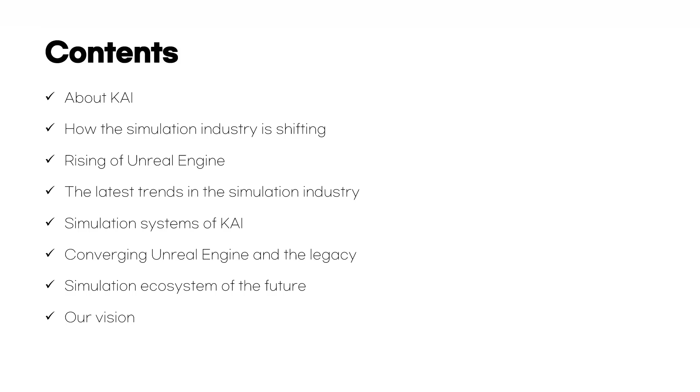2024 series. In this session, I will talk about the latest trends in simulation that have changed with the advance of Unreal Engine and show you how Korea Aerospace Industry has merged its legacy simulation system with the latest trends. I will also share our future vision for how we plan to utilize Unreal Engine in the future to develop sustainable simulation content.

First, here is Korea Aerospace Industry. You can call us just KAI. KAI is a total solution provider in aerospace.

Chapter 1 is simulation ecosystem. I want to talk about how the simulation industry is shifting first. In recent years, the simulation industry has experienced rapid development, bringing about significant changes.

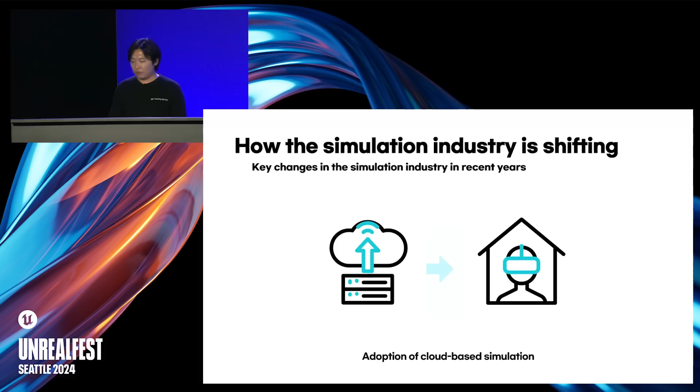One of the key changes is the shift to cloud-based simulation, which has greatly enhanced accessibility and collaboration. Cloud-based simulation provides access to high-performance computing resources from anywhere in the world, enabling seamless collaboration across remote locations. As a result, we can now perform more complex simulations faster and more efficiently while reducing our reliance on physical infrastructure.

Digital twin technology creates digital replicas of physical assets that exist in the world, allowing their condition to be monitored and simulated in real time. This technology is primarily used in manufacturing, aerospace, and construction, among others, to reduce maintenance and operational costs and enable predictive maintenance.

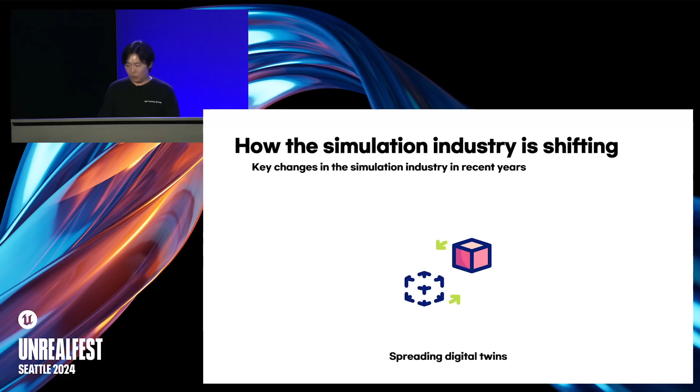Integrating AI and machine learning technologies into simulation has led to more sophisticated and predictive results. These technologies play a big role in anticipating problems that may arise during the design phase and finding optimal solutions through iterative simulation. Machine learning is automating data analysis during simulation to maximize efficiency.

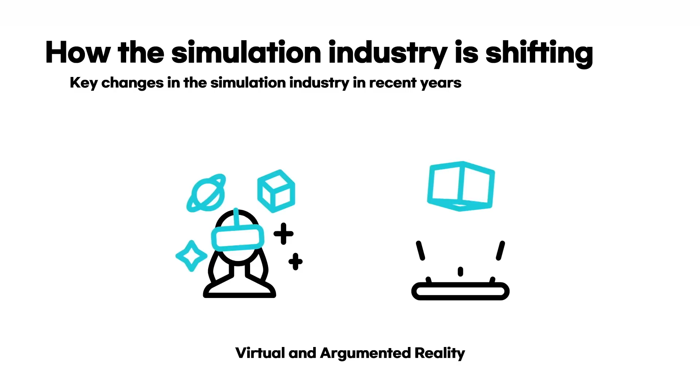Virtual reality, VR, AR, MR, have greatly enhanced the immersion in training and simulation environments. These technologies are increasingly being used in highly immersive areas, particularly in aerospace, military, and healthcare, and are helping to make learning and training in real-world environments safer and more efficient.

Simulation software is also starting to adopt microservices architectures. This approach breaks down the simulation process into smaller, independent services, each of which can be developed and deployed independently. This greatly increases the flexibility and scalability of simulation software and allows for faster updates.

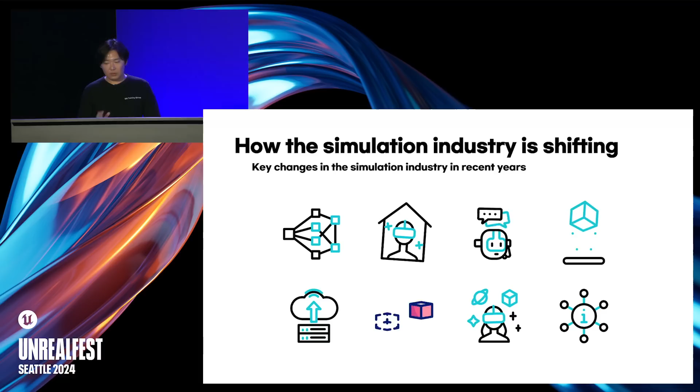These changes are moving the simulation industry from a simple modeling tool to a core technology that delivers complex engineering and simulation solutions. These trends are expected to evolve further and drive innovation across a wide range of industries.

So let's look at the simulation ecosystem in Unreal Engine. The simulation team of Epic Games once said there are two industries that are leading the way in real-time 3D graphics: the game industry and the simulation industry.

I agree with that, and I believe that Epic's Unreal Engine, which has been a leader in 3D graphics for many years, is not only a game engine, but also a simulation engine.

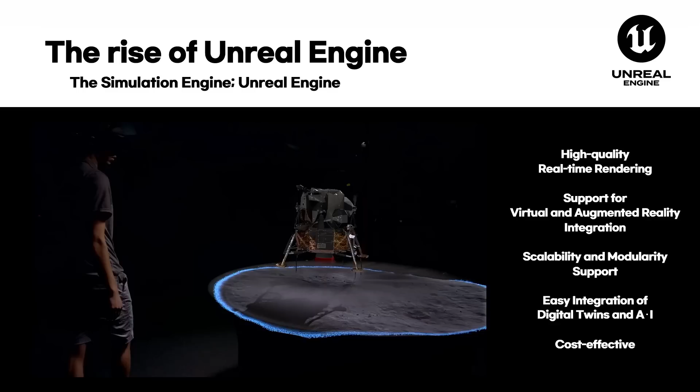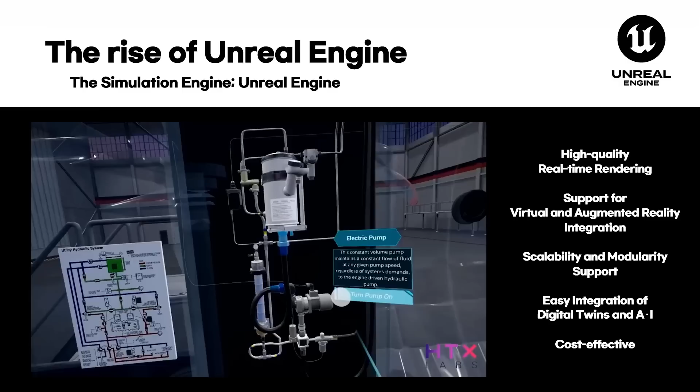Unreal Engine has made significant strides in the simulation industry. Its advanced graphics capabilities enhance immersion, especially in aerospace, automotive, and military training. It seamlessly integrates with VR, AR, MR, adding depth to simulations, and its modular design supports easy scaling and integration with legacy systems.

The use of Unreal Engine with digital twins and AI increases efficiency in maintenance, designs, and operations. Furthermore, its open source tools reduce costs, making high-quality simulations more accessible and enhancing realism and efficiency across the simulation ecosystem.

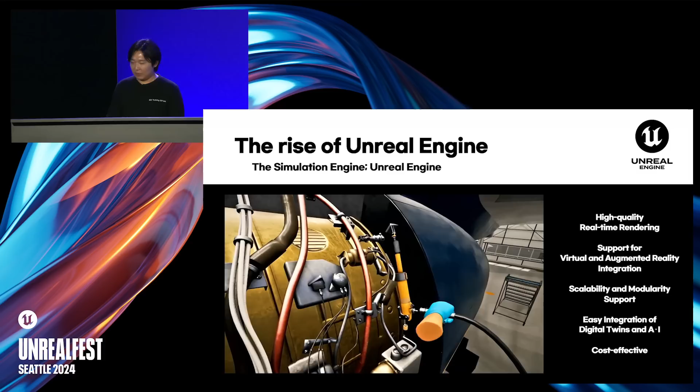Over the past few years, Epic Games implemented several key simulation features in Unreal Engine, particularly in their work on important simulation projects. Project Anywhere and Antoinette have been a great inspiration and opened up the possibilities for bringing flight simulation to Unreal Engine. Unreal Engine provides a practical process for developing simulations, from defining scenarios and content to implementing special features, integration, and support for functionality at the framework level.

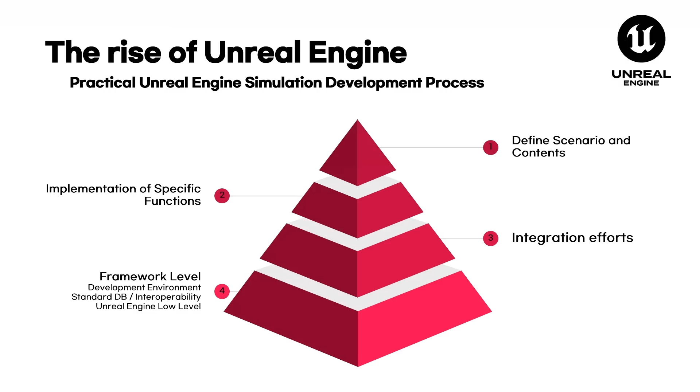It provides all the essential features for simulation development. As you can see, this practical process quickly has a huge impact on the creation of simulation applications, from content creation to scenario execution and interaction in training.

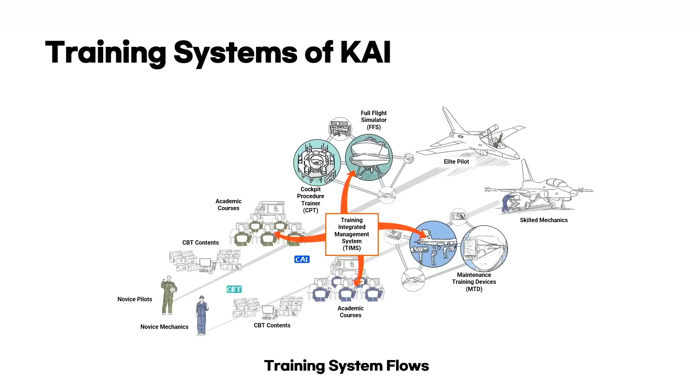KAI also has a large lineup of training systems across multiple areas, from novice mechanics and pilot trainees to elite pilots and skilled mechanics. We provide a structured training system. As you can see on the screen, we have simulators in all areas, from CBT content to full flight simulator.

FFS. So simulation technology has evolved from simple training tools to crucial components in designing and optimizing complex systems. These shifts, influenced by advancements in data-driven simulation and the rise of digital twin technology, have expanded the role of simulation from just training to supporting real-time operation. These changes are making me feel we should do something with new technology convergence.

Unreal Engine has become a pivotal technology in simulation across various industries. Its high-quality graphics and real-time rendering enhance realism, improving the effectiveness of training and testing. The engine's flexibility, supported by open-source libraries and plugins, allows for customization and integration of new technologies, making it adaptable to changing market demands. Modern markets and users demand highly realistic simulation technology that closely mimics the real world, which is crucial for effective training and testing. Unreal Engine meets these expectations with outstanding simulation features.

KAI is at a pivotal stage in modernizing its traditional simulations by integrating them with the latest trends using Unreal Engine. This integration has revitalized KAI's legacy systems, significantly enhancing realism and efficiency. This has greatly improved product development and maintenance efficiency. This strategic move is crucial in building a new simulation ecosystem. In this session, we will delve into KAI's use of Unreal Engine, discussing our strategy, challenges, and future vision.

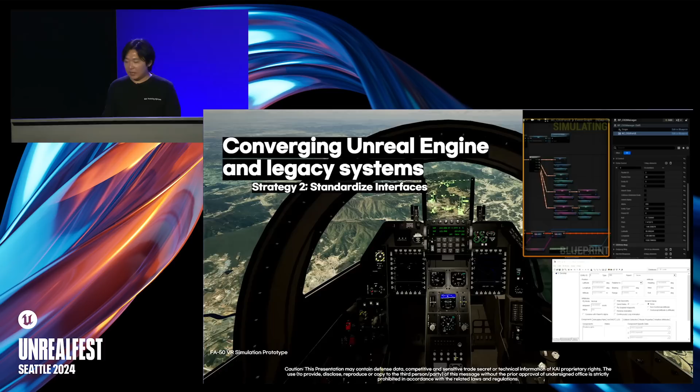KAI has built legacy systems over many years, accumulating a vast amount of valuable data. While these systems remain important assets, seamless integration with newer technology is crucial to unlocking our full potential. Standardizing interfaces for integration between legacy systems and Unreal Engine is essential. This standardization enables legacy systems to work seamlessly with new technologies, ensuring data and functionality interoperability. As a result, KAI can leverage its existing assets while maximizing the benefits of the latest technology.

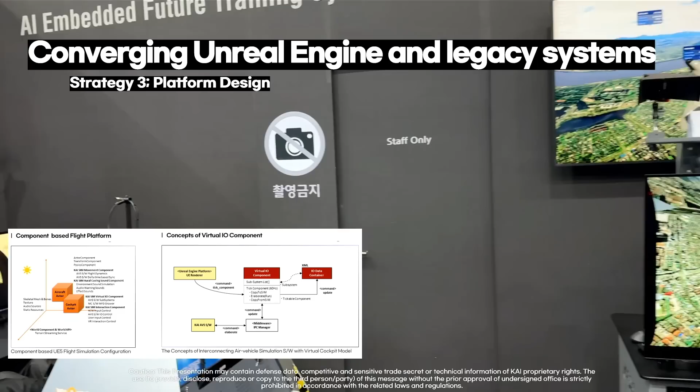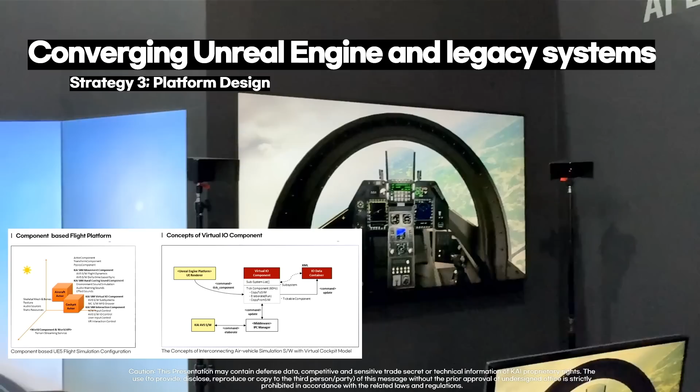Simulation systems shouldn't be built as a one-time project. They need to evolve and expand over time. To achieve this, a platform design that supports sustainable content development is required. By utilizing Unreal Engine's modular structures and the open source ecosystem, we are creating a platform that can be continuously developed and updated with diverse content and features. This approach allows KAI to easily add new scenarios or features as needed, ensuring the long-term longevity of the simulation system. Additionally, the platform facilitates collaboration with external developers and partners, laying the foundation for building a larger ecosystem.

Let me explain the convergence of KAI and the Unreal Engine. First up is flight simulation. I designed a platform to enable the development of sustainable simulation content while developing dedicated components and plugins for flight. The first is the development and platform details of dedicated components and plugins.

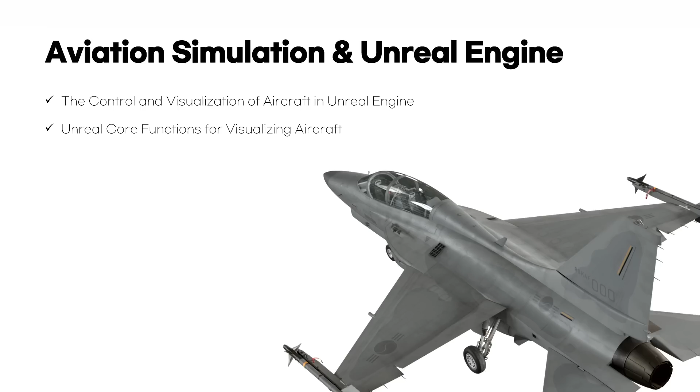This section will cover two main topics. First is aircraft control and visualization in Unreal Engine, especially focused on CG interface. And the second is the core concept and techniques for visualization of aircraft in Unreal Engine.

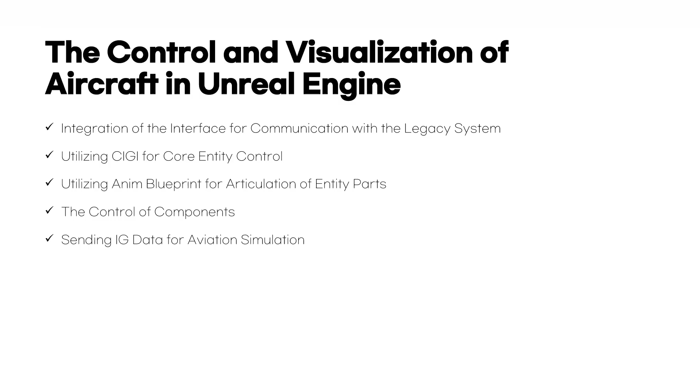The first topic is aircraft control and visualization in Unreal Engine. This topic consists of 5 subtopics. They cover the important aspects of core elements for the integration of aviation simulation in Unreal Engine.

The most fundamental function for aircraft simulation is moving the aircraft, whether it's driving on the ground, taxiing, or maneuvering in the air. To control the transform of the aircraft in the new world is the most basic requirement for the integration.

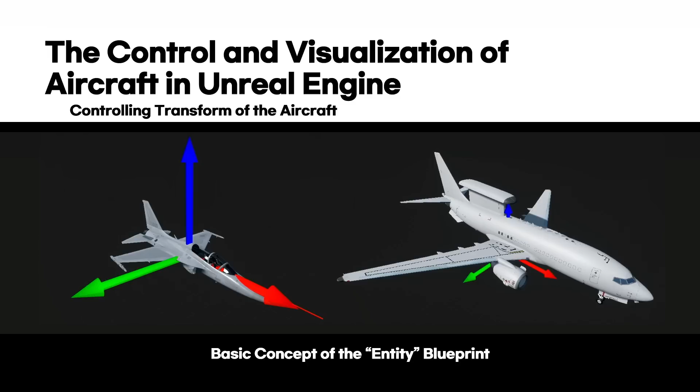To do this, we utilize the interface named CIGI, the Common Image Generator Interface, which is used by existing image generation devices, and implemented some functions in Unreal Engine using C++ to create a function library and convert CIGI packets to Unreal structures and vice versa.

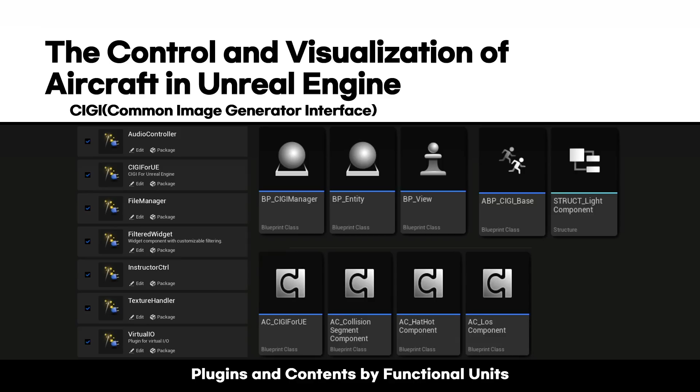We implemented actors that can communicate with other systems using CIGI by using the corresponding actor components, and developed them in a reusable form by packing them as plugins by their functional units. By utilizing these, we have integrated a basic system that controls the core functions for communication between aircraft simulators and image generating devices supported by CIGI, and have been developing to expand the core features based on them.

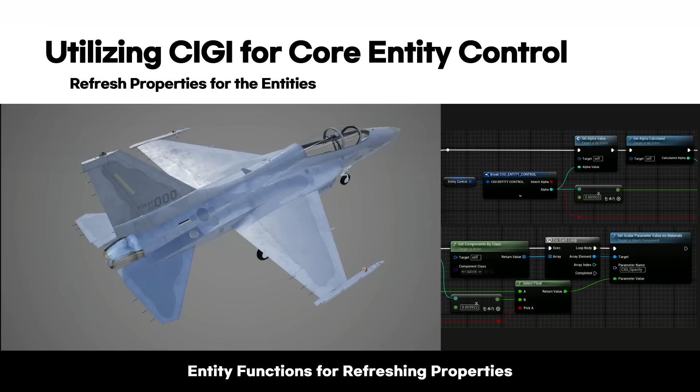Most objects are represented in image generating devices, including aircraft. They are called entities in CIGI, and the packet to control them is the entity control packet. Each entity has not only the basic function of updating location data based on whether it is relative or absolute, but unique properties such as rotation, scale, or opacity. These properties can be controlled and updated by Unreal Engine as it receives the entity control packet. In the example, the opacity of the aircraft is changed as the property named alpha is controlled.

The function of reflecting articulation data received via CIGI packets to an entity can be implemented using anim blueprints. A packet called articulated part control is defined in CIGI, which allows you to set properties such as parallel movement or rotation of a predefined articulated part of an entity. This example has been developed to receive the transform data from the packet and control the rotation value directly from the data.

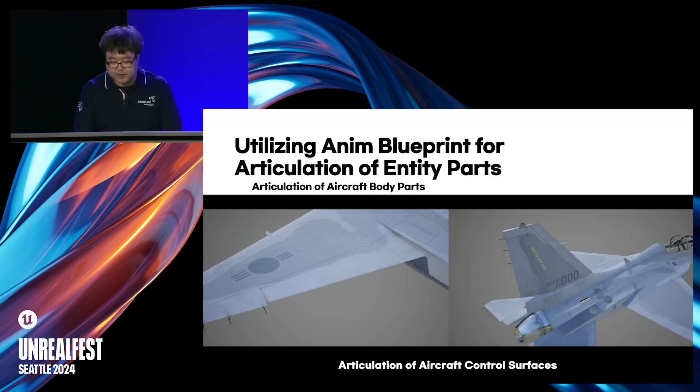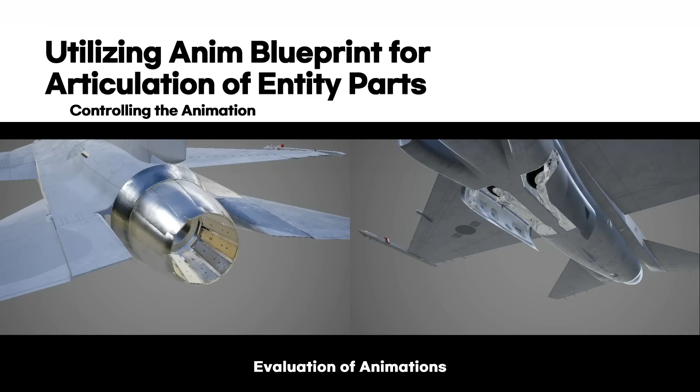While the entity control packet contains properties that control the animation state of an entity, it is usually more convenient to use art part control to independently control the animation of the various articulated parts in an entity. By defining a unique property of the art part control as animation time, it is possible to procedurally control the animation using the evaluate node. This controlled animation is then blended with the state of the other articulated parts using the layer blend per bone node.

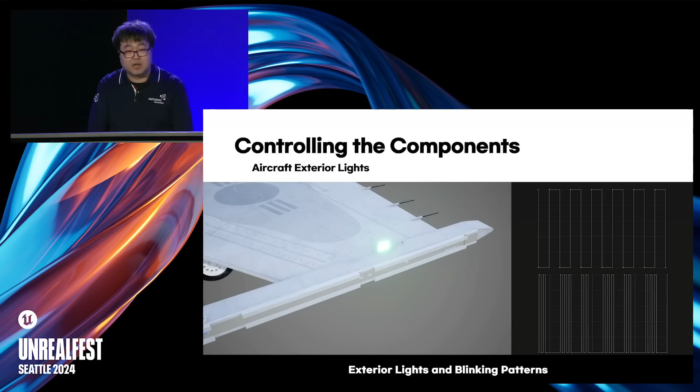There are some properties that cannot be controlled by entity control and art part control. A packet that allows control of those properties is the component control packet. You can define which operation is to be performed when you receive this packet with component type and component ID. The example shows some curve presets that define several flashing patterns for the exterior lights of an aircraft. Flashing patterns are changed by replacing these presets.

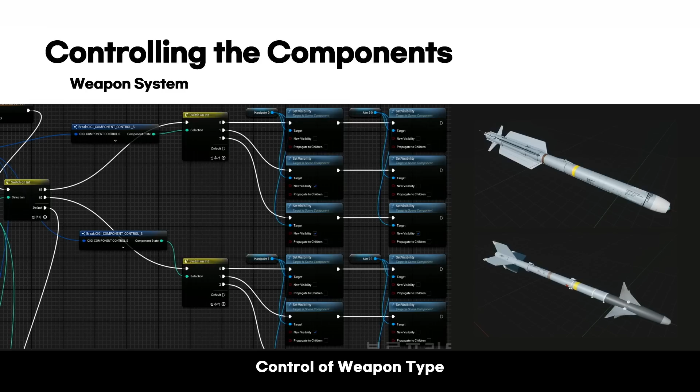We have implemented a feature that allows you to attach and detach weapons such as missiles from entities via component control. The presence or absence of mounts for attaching weapons, as well as the type of weapons, can be controlled and changed using the component control packet.

Aircraft simulations use various internal properties such as atmospheric conditions, the aircraft's aerodynamic properties, and fuel levels to control flight state and aircraft movement. However, when the aircraft needs to interact with geometry on the ground, such as takeoffs and landings, the image generator must provide that information.

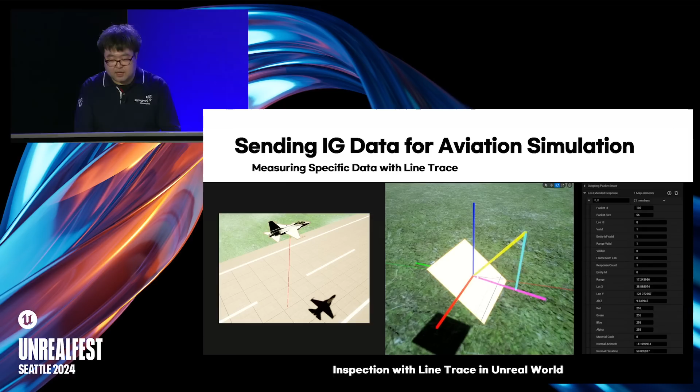The line trace feature of Unreal Engine can be used to continuously measure the distance from the ground to a specific point of an aircraft, to inspect information such as height of terrain, height above terrain, and line of sight, to be communicated to the aircraft simulator in CIGI packets.

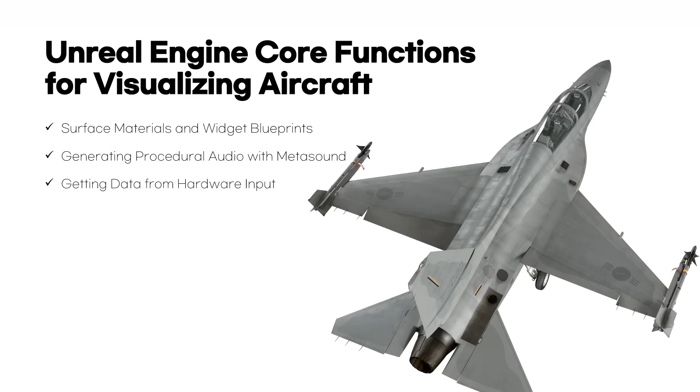The next topic is developing features beyond CIGI. That covers the process of implementing features in Unreal Engine to make aircraft more realistic and responsive to interaction. Unreal Engine provides PBR materials to generate realistic surface materials. In addition to the material's reflection of light sources performed on the surface, post-process features like bloom, screen space ambient occlusion, and more also provide more realistic visual effects.

The material graph of Unreal Engine provides an interactive and intuitive user interface, so it makes it easy to design procedural patterns that can be applied to materials. Material instances also allow for the creation of editable copies of materials that can be easily controlled manually.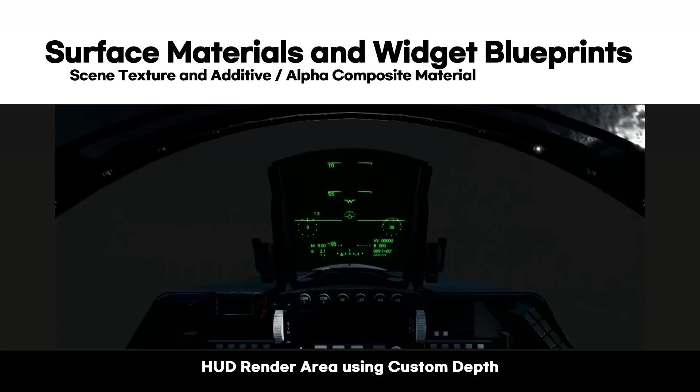The scene texture node provided by Unreal Engine allows a specific layer in screen space to be used as a texture, which can be used to detect a specific area in screen space and restrict the rendering of surface materials to the inside of that area, making it possible to create a HUD that resembles a real-world HUD.

While it is possible to design and control complex procedural patterns with Unreal materials, it is often more convenient to use widget blueprints to create images that are complex or contain a large amount of numerical or text representation. Widget blueprints can be used to add a widget component into the world and also can be imported as a render target for use in surface materials.

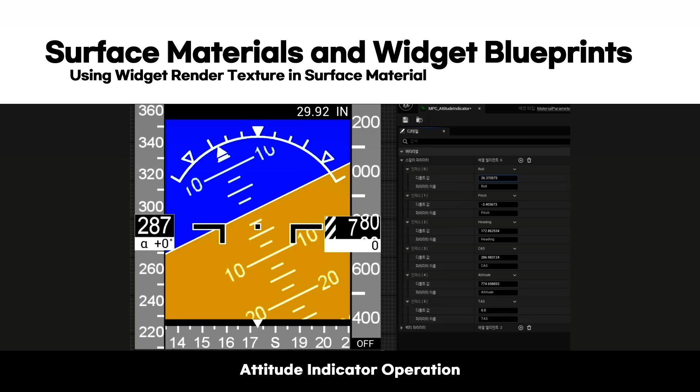Unreal Engine also provides a feature called MetaSound that allows you to procedurally generate and control audio beyond simply playing and controlling the existing audio assets. This allows noise and basic waveforms to be generated and combined to create a wide variety of audio, and procedurally generated filter effects can be applied even when playing the wave assets. So let me play some audio in this place.

This is the engine noise of the aircraft, and it is designed all procedurally by the noise.

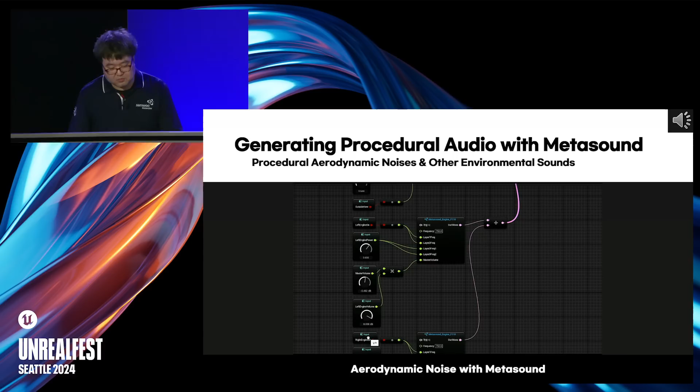And a MetaSound graph can be reused in another MetaSound graph as a node, and it is possible to create Morse tones with complex duration and interval control of simple short frequency waveforms. This is completely procedurally generated, and allows the audio tone, duration, and interval to be controlled dynamically as separate properties. Let me play this again. This is also procedurally generated.

And Unreal Engine can handle input from hardware using a raw input feature, but there is a plugin called Control Assist that is more convenient for handling multiple devices simultaneously. This can be used to simplify the hardware setup, which can vary for the types of aircraft models, and make it simple to process the corresponding signals in Unreal Engine.

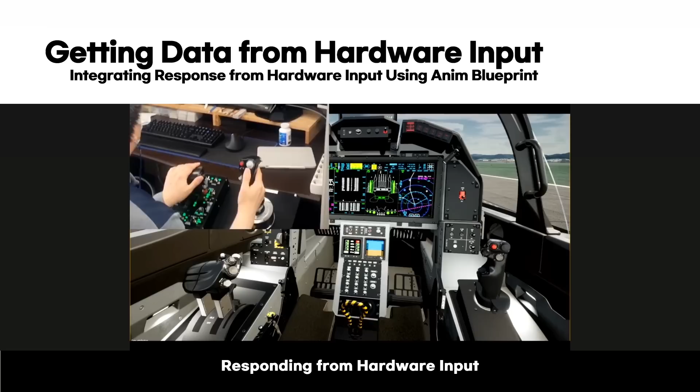Anim Blueprint in Unreal Engine also allows for efficient control over the animation of skeletal meshes, such as controlled aircraft articulated parts in animation. Controlling the virtual cockpit is also very convenient using the Anim Blueprint. The animation blueprint receives processed input from the hardware as key-value pairs. So utilizing blueprint interfaces or derived blueprints from Anim Blueprints allows for more reusability and structural flexibility.

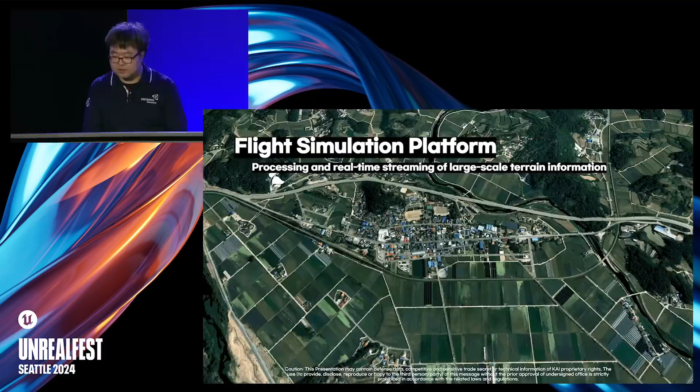The georeferencing system makes converting the location simpler. Rotation requires some merging of rotation values because it must be calculated relative to the ellipsoid normal. But the conversion can be done by merging the ellipsoid normal and the rotation value corresponding to north, east, and up. Using this, it is possible to express the position and rotation of an entity in the Unreal world based on its latitude, longitude and altitude in a simple procedure.

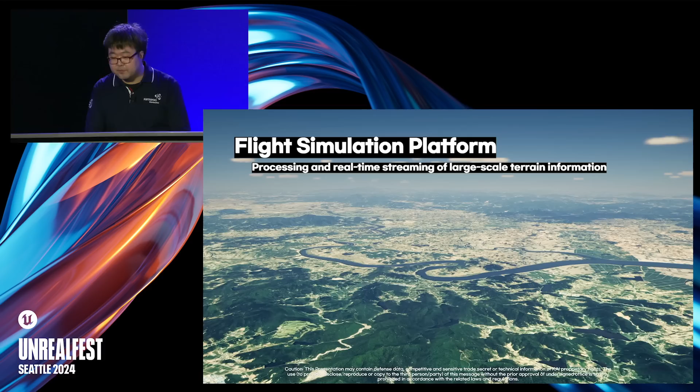There are many ways to represent terrain in Unreal Engine, but due to the nature of viewing terrain from high altitudes, it is necessary to implement a spherical representation of the Earth. We use Cesium, one of the many terrain solutions compatible with Unreal Engine, to stream terrain into the Unreal world.

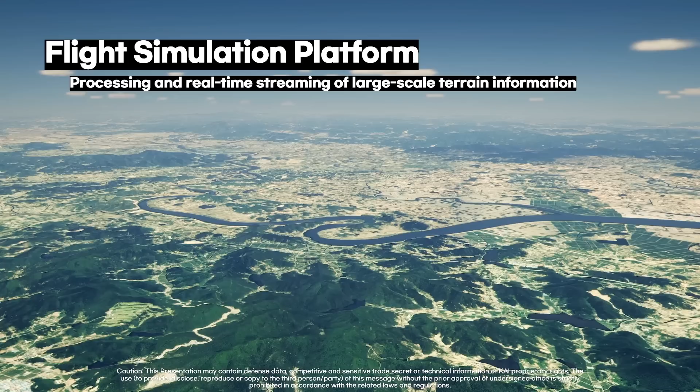Streaming data imported as raster images is merged through a layered material that has different rendering methods for different types of data, just as layers are typically used in GIS, the Geographic Information System. By defining the layer blend property of this layered material and the material layer, it is possible to represent different textures on parts of the ground area. Okay. This is the end of my part.

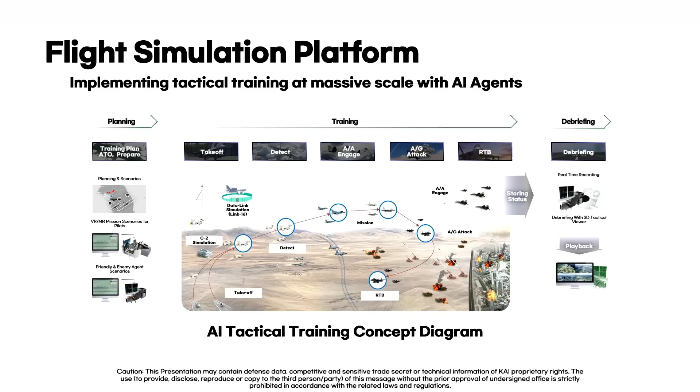The third is the adoption of large-scale tactical training through the development of AI agents. Using Unreal Engine to rapidly create prototypes, we are working with the South Korea Air Force on a rapid research project to enable large-scale tactical training on the Korean Peninsula field. The AI agents created will allow our Air Force pilots to perform a variety of tactical exercises in an extremely realistic environment. As you can see on the screen, there are AI agents trying to combat with our pilots. There will be players and AI agents coming and flying by.

Yeah, this video contains sensitive information, so let's move on.

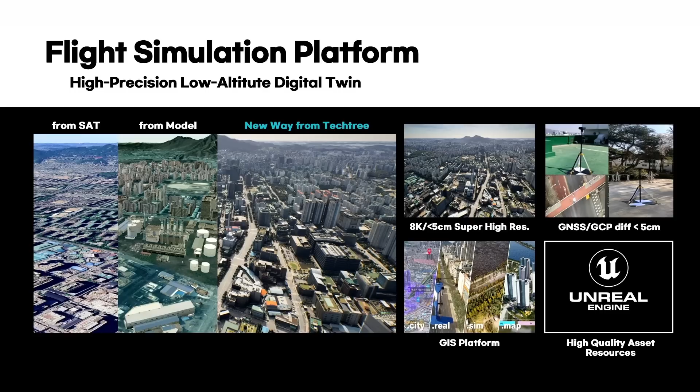Thank you. And let me introduce a new approach to spatial digital twins. Traditionally, the simulator industry has relied on 2D worlds created from satellite imagery and altitude data. Later, 3D worlds were incorporated through modeling for certain flight references, but this was insufficient for creating digital twins of large urban areas. So we shifted our focus to ultra-precise wide-area digital twin technology using drones and discovered an effective solution.

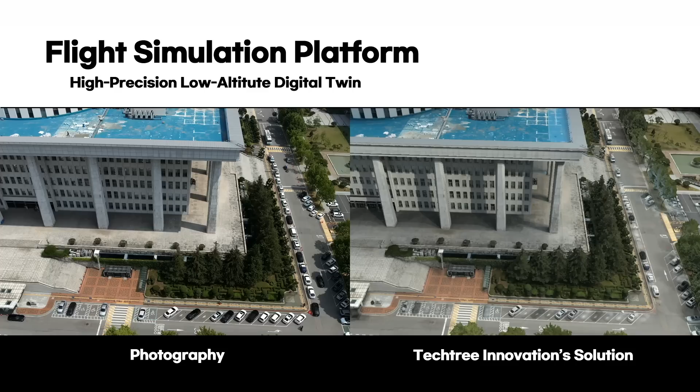This solution delivers 8K resolution textures and 5 centimeter imagery, utilizing GNSS GCP technology to produce digital twin maps with an error margin of 5 centimeters or less. This photography and the next one, the digital twin map, is 2 centimeters. And we utilize RTK GPS to get precise location information.

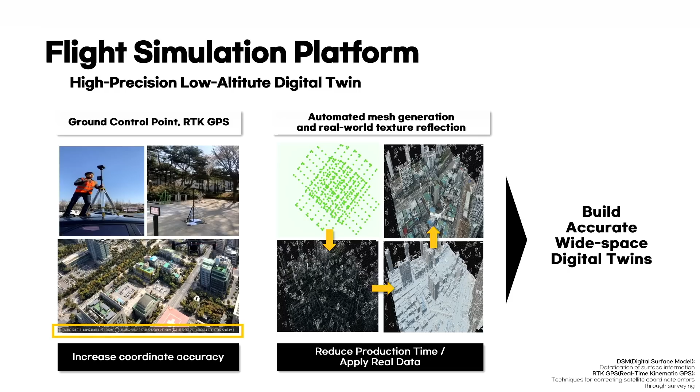We also automated mesh generation and texture creation during the build process. Our digital twin technology maximizes coverage while minimizing error. Techtree Innovation in South Korea's solution has solved the problems that existing digital twins have had: precision, efficiency, scalability, realism. The world's only spatial digital twin platform company based on high precision, high resolution scanning by drone.

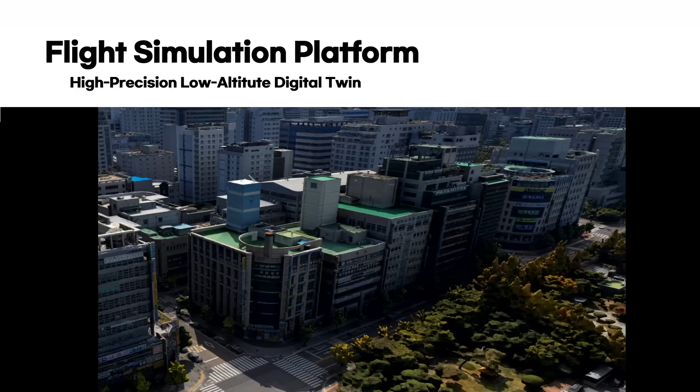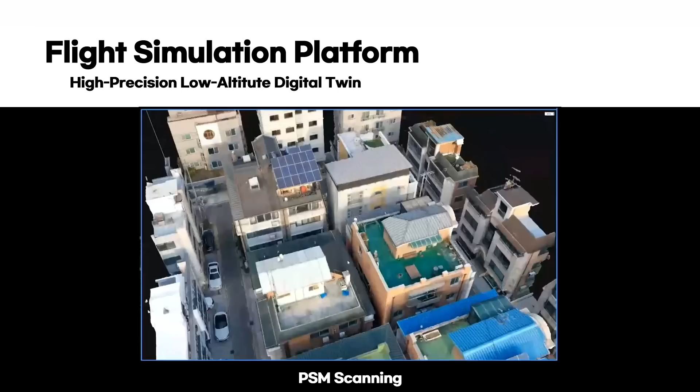As you can see on the screen, this is a new approach to supporting fast-moving spatial digital twin market needs. This old one has become this new one. Techtree Innovation's solution involves matching PSM. PSM is photogrammetry software mapping. PSM wide area scans with real-world coordinates and drone GPS.

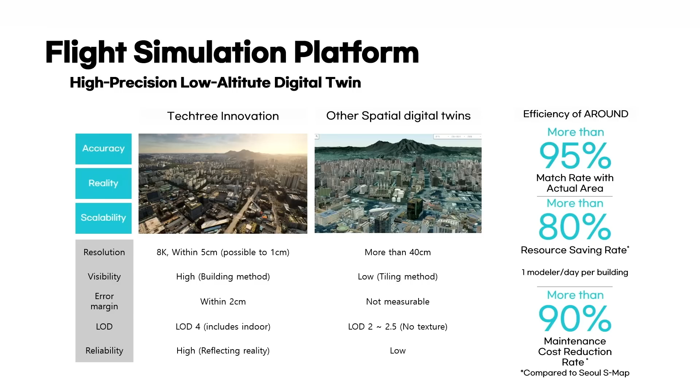This process enables fast and accurate creation of wide area geometric digital twins by converting pixel information into cloud data, generating meshes, extracting textures, and automating DSM. By using the most precise construction method available, this solution creates the most realistic digital environment possible. This solution has more than 95% match rate with actual area, more than 80% resource saving rate, and more than 90% maintenance cost reduction rate.

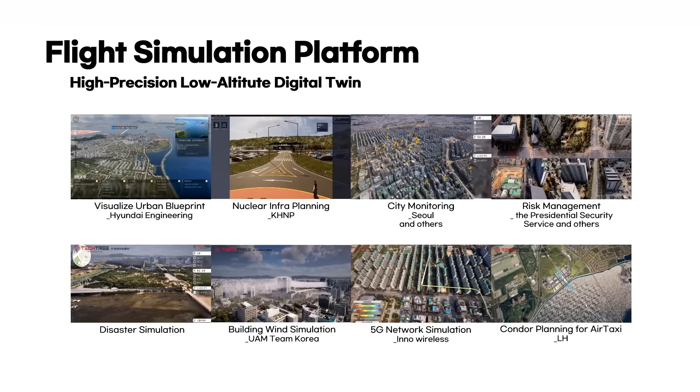And this is a usage of the digital twin solution for simulators and testbeds. There are a lot of simulators. This digital twin solution is also used in many places: urban blueprint and monitoring, risk or disaster simulation, and so on. As you can see on the screen, we made a VR-based helicopter simulator prototype with Unreal Engine 5.4 and the digital twin solution. It took us just 2 months for a flight like this. I believe this result is a strong case for leveraging the platform.

Here is nearby Seoul, which is our capital city. There are many buildings and many construction sites and environments. Moving on. Next is nDisplay and Mosaic technology as clustering computers to enable multi-channel, multi-display flight in an ultra-accurate, low-altitude digital twin environment.

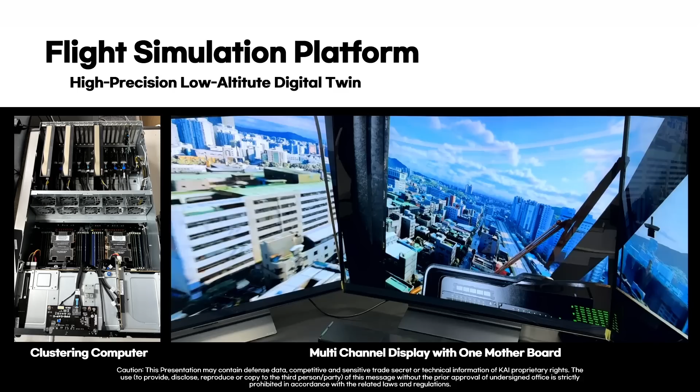To support multiple video channels, traditional simulators have provided multi-channel by stacking video computers for multiple channels. With the possibility of multi-channel configuration utilizing multiple GPUs on a single computer with today's computing power, I've been researching and developing nDisplay and Mosaic recipes that allow for multi-channel configuration using up to 8 GPUs on a single board via clustering computer. What you see here is a multi-GPU setup on a clustering machine to handle 3 channels.

And next up is maintenance simulation. Similarly, in the field of mechanic simulation, we thought a lot about how to efficiently build a content pipeline to continuously produce high-quality content. In addition to building realistic content, we developed and introduced a user interaction system that prioritized user experience, and game features and a task system for sustainable content creation.

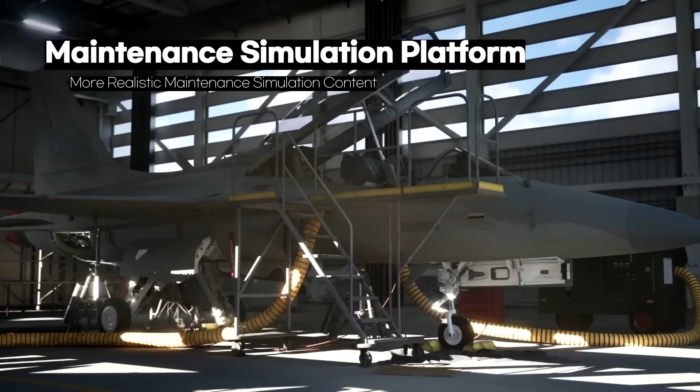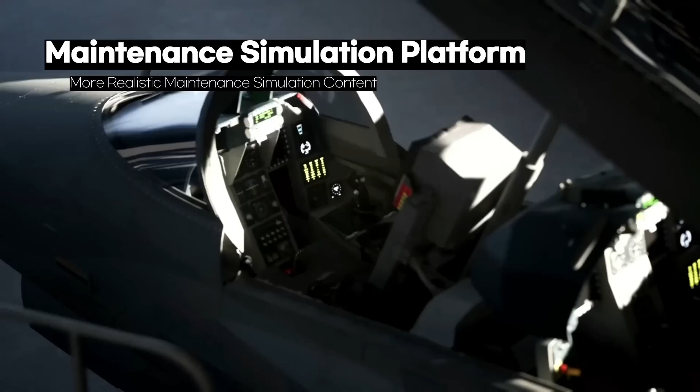It's important to create an experience that mirrors the real work environment, especially for mechanics who have complex tasks. Training on actual aircraft repeatedly is challenging, so realistic immersion in VR is essential for effective training. We created ultra-high resolution textures using CATIA data with millions of polygons, optimized for Unreal Engine. By combining this with real-world aircraft pictures, we captured both the interior and exterior to give mechanics a real visual experience.

Using Unreal Engine's material editor, we depicted materials like metal, glass, and plastic in a realistic way. We also used virtual textures in UDIM format to optimize 8K textures so users can feel like they're working on real aircraft parts.

The environment and various toolsets were carefully designed to provide a realistic experience of the maintenance process. We included detailed animations that mimic real-life maintenance situations. To achieve this level of realism, the team needed a system that could handle large amounts of data in real time. Unreal Engine made this possible.

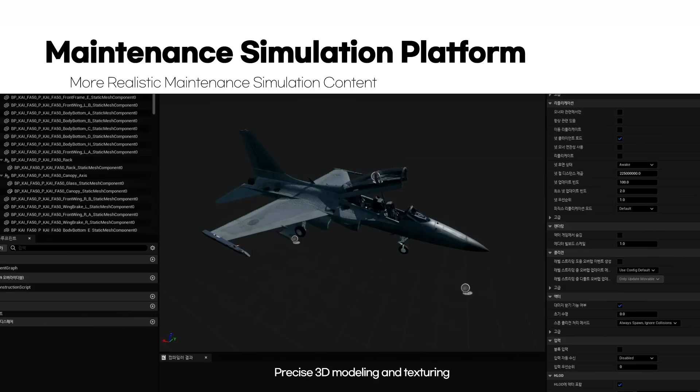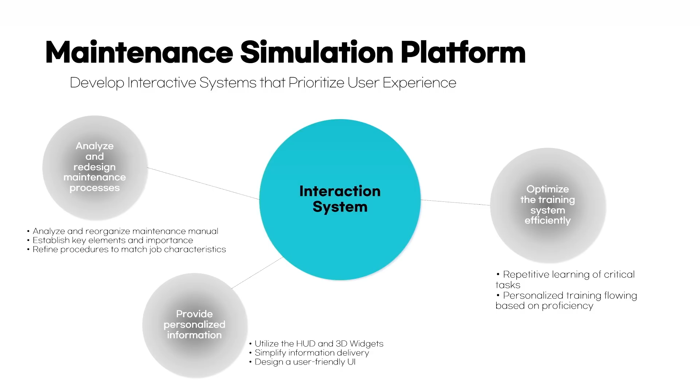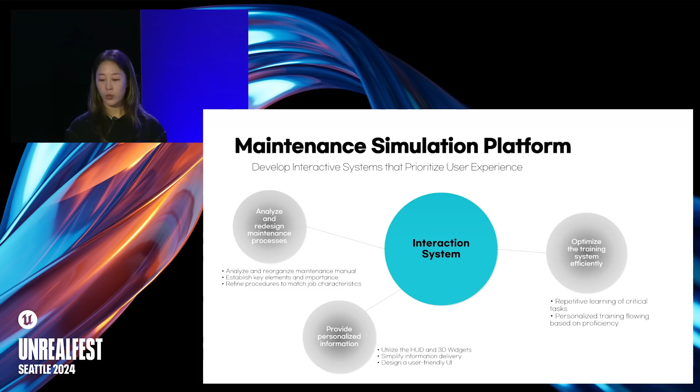To bring maintenance procedures into a virtual environment, we analyzed the maintenance manual and focused on the key elements. We simplified the procedures and reduced complexity to make them easier to follow. This process involved understanding the mechanics' needs and work environment. We aim to reflect the real maintenance process in a virtual setting.

The original manual presented the maintenance process as a simple sequence of actions without highlighting the importance of each step. When we moved this process into the simulation, we redesigned the task to highlight the key actions. For example, we simplified their work process by reducing unnecessary steps. We also adjusted the information based on the mechanics' skills.

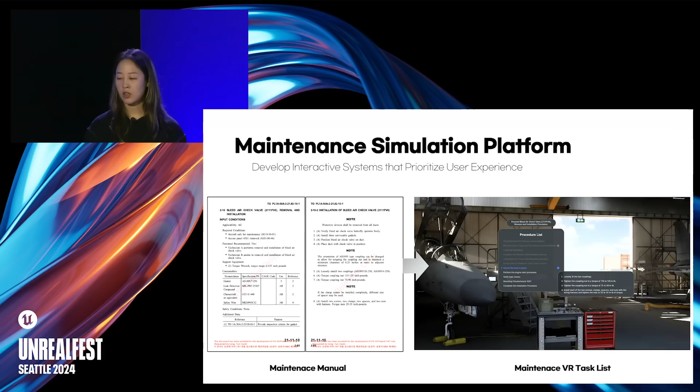Skilled mechanics could focus on their main task, while less skilled mechanics had an option to hide unnecessary tasks by clicking one button. This approach allowed mechanics to develop practical skills in a virtual environment, while learning at their own pace.

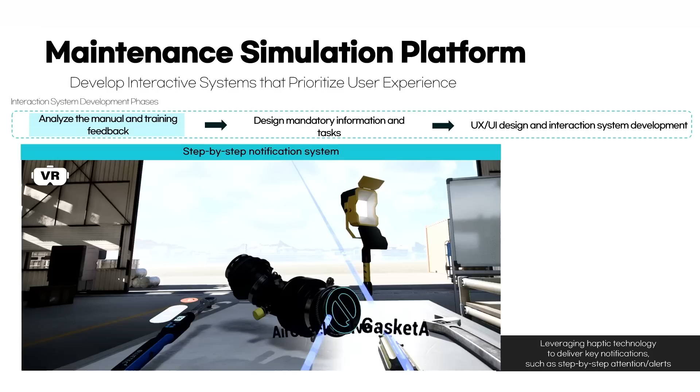One piece of feedback that we received from the mechanics who previously used the VR maintenance was that warning signs and notifications were distracting. To solve this, we simplified how information is delivered. We use 3D widgets to show task steps and tool info, but we keep it simple so that they only appear when needed. You can easily turn this information on or off with a button, which helps keep the screen clear.

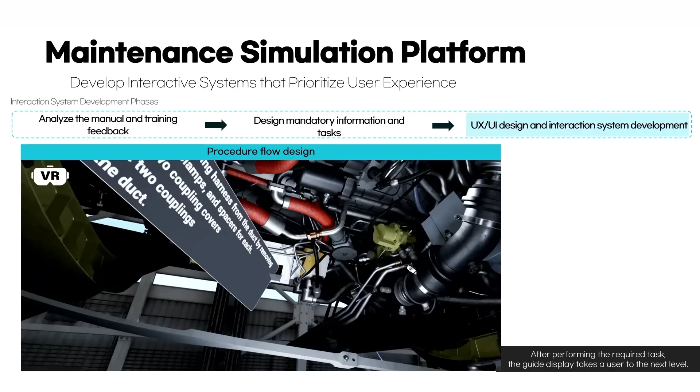We also added haptic feedback to signal each maintenance step, and we made sure that the simulation doesn't move forward until all critical tasks are finished. Tasks can be automatically accepted or must be accepted once specific conditions are met before they can be considered fully complete. Lastly, we created an efficient content pipeline to maintain and scale these high-quality contents, which I will explain next.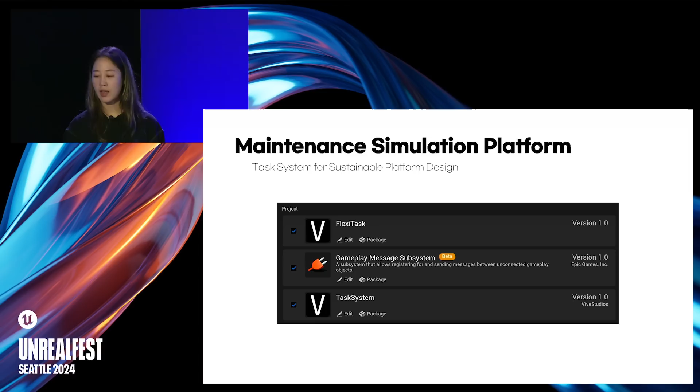When developing our maintenance simulation environment, we focus on scalability and sustainability. To handle different scenarios and to keep trainees engaged, we have created a system that combines Unreal Engine's gameplay message system and game features with our own task system.

For this project, we needed to manage many parts and data inside the aircraft more efficiently. Some had to follow a specific order, while others were more flexible. To handle this, we had to use flexible systems, which are gameplay tags and the currently beta gameplay message system. The gameplay message system lets you register and send messages among objects that are not directly connected.

Instead of using the event dispatcher, we implemented an event-driven system based on the publisher-subscriber architecture. In this system, the publisher broadcasts events without knowing who the subscribers are, and subscribers can receive specific events without needing direct reference to the publishers. This enables more efficient and scalable event handling within the system, making task management much easier.

We got this plugin from the earlier engine sample project, Lyra. It's still in beta, but it offers a lot of advantages. It helped us simplify the flow of events and made maintenance easier. Because of this, we could manage the complex interactions between different components more efficiently.

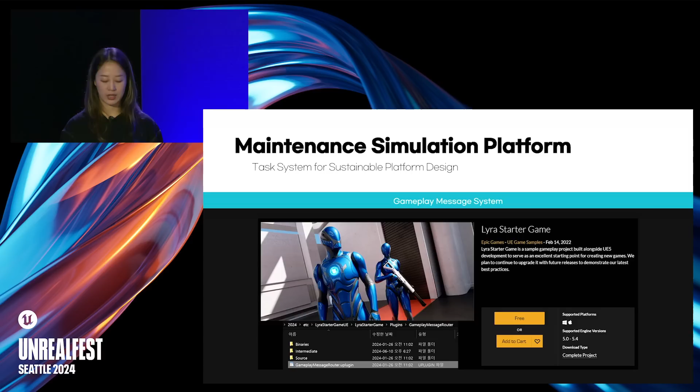Each message channel in the system uses a gameplay tag from the Gameplay Ability System, which can be managed through a data table. This setup allows the system's components to work independently but connect without any difficulty. Gameplay tags make it easier to manage and scale. Their flexibility allows us to add new parts or features without disrupting the existing setup, helping the system to grow over time.

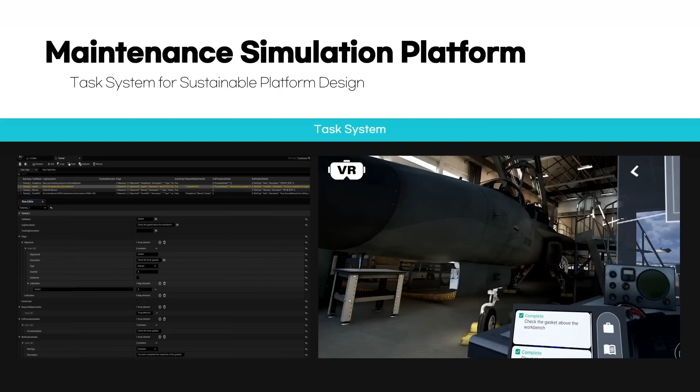The task system, which I will discuss next, was designed to organize and manage the simulated maintenance environment. It used a scenario-based Unreal data table to manage tasks assigned to trainees and track their progress. The data table contains information like activation conditions and completion requirements for each task. Using this data, tasks are assigned and their progress is monitored.

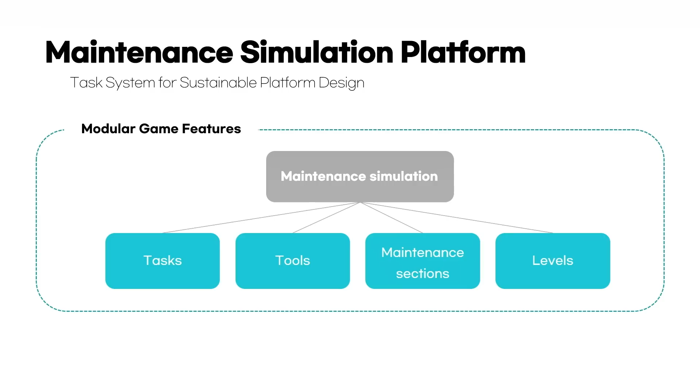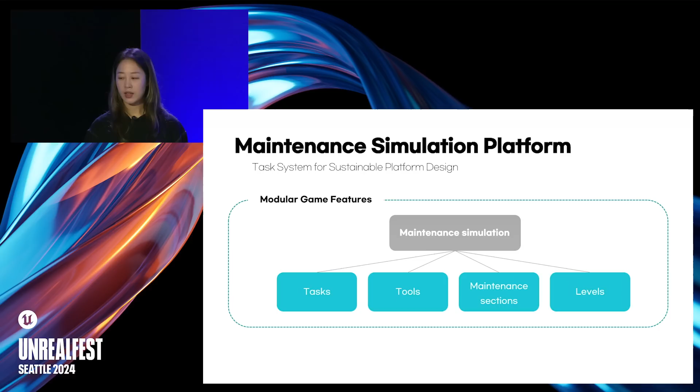The task system was designed with a modular approach. Each task is a self-contained module that can be easily added, removed, or modified for different maintenance scenarios. We used game features to manage these modules in a dynamic way, enabling or disabling them as needed. These task systems are built as plugins and depend on game features, allowing them to be used independently. You can also set plugin dependencies by editing game features on the plugin pages.

This has improved the system's flexibility, and its scalability allows new tasks or scenarios to be easily added to the existing structure. As a result, the development team has achieved more in less time, leading to clear improvements in both project progress and work efficiency.

The combination of Unreal Engine's plugin system and the task system has allowed us to build a strong framework for organizing and expanding the features of our content. Since both systems are designed to be modular and flexible, it's easy to add new features or change existing ones. For example, when new training scenarios or tasks are needed, they can be easily added to the current system. This allows us to quickly adapt and provide content that meets the needs of trainees.

To make it even easier, we are using Unreal Editor scripting to develop an intuitive user interface. This lets non-developers use the task system in complex maintenance situations. We customize the editor so that non-developers can create and modify tasks as easily as using visual scripting. This system allows task scenarios to connect smoothly with maintenance actors, and it works without the need for complex coding, making it intuitive to use.

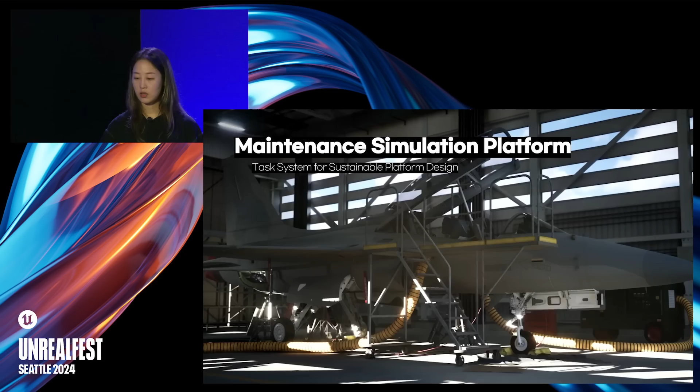Here's a video showing a VR simulation developed with the features I just explained.

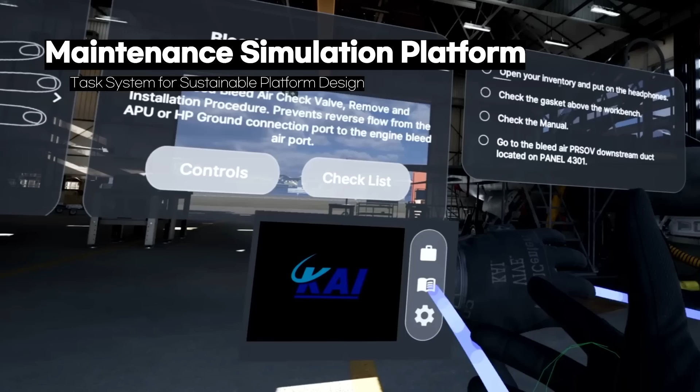By combining various features of Unreal Engine with the task system, we have created sustainable content that allows trainees to set and achieve new goals continuously. We have also created an environment where non-developers can easily manage and update the system, maximizing efficiency in development and maintenance. Also, this system was developed for aircraft maintenance simulations.

It can also be adapted for use in various industries, such as manufacturing, healthcare, and education, providing efficient training environments. Its scalability and flexibility make it easy to customize for a wide range of scenarios, and it plays a key role in the diverse content developed by Vive Studios. We plan to continue enhancing this system in the future.

Our last chapter is vision. The current simulation ecosystem is actively adopting virtual reality, similar to recent changes in other industries, and is utilizing high-resolution graphics and 3D modeling to provide a more realistic simulation environment.

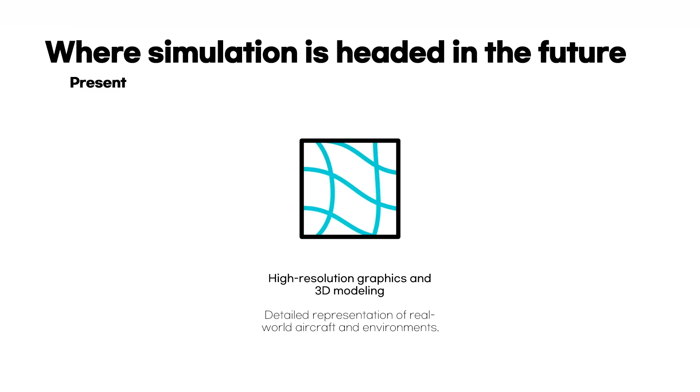The simulation industry of the future will leverage AI and big data to deliver personalized training programs and performance analytics, with cloud-based simulation greatly improving the accessibility and efficiency of remote training. In particular, the cloud will enable high-performance simulations to be run from anywhere, enabling training without geographical restrictions, and real-time collaboration will allow multiple users to train in the same simulation environment simultaneously. The ability to instantly apply the latest software and data ensures a consistent training experience.

Additionally, advances in wearable technology allow for real-time monitoring and feedback using biometric data. This enables personalized feedback for learners during training and allows for immediate adjustments to enhance the effectiveness and safety of the training.

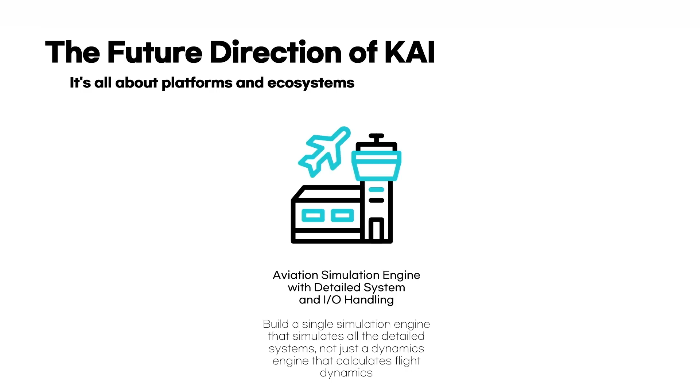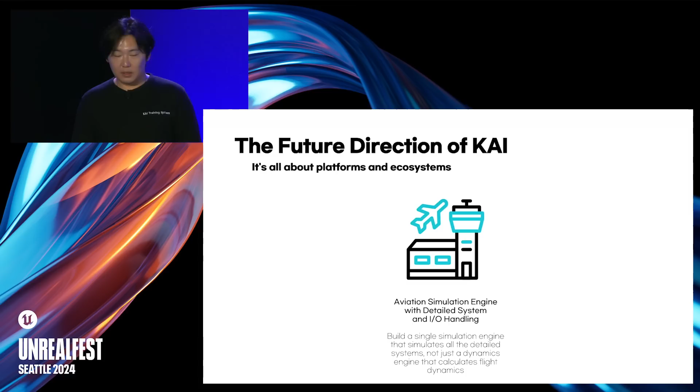And what is the future direction of KAI? The answer is very simple: it is all about platform and ecosystem. With the results of the current integration, we will further enhance the platform and ecosystem. As I mentioned, Unreal Engine is a simulation engine, and with the amazing results we've seen here, we will be leveraging it even more to develop our own aviation simulation engine with Unreal Engine.

We continue to use Unreal Engine as a simulation engine, and we are participating in the I/ITSEC exhibition in Orlando on December 2nd this year. You can experience and discuss all the projects introduced today with me, so please come and join us.